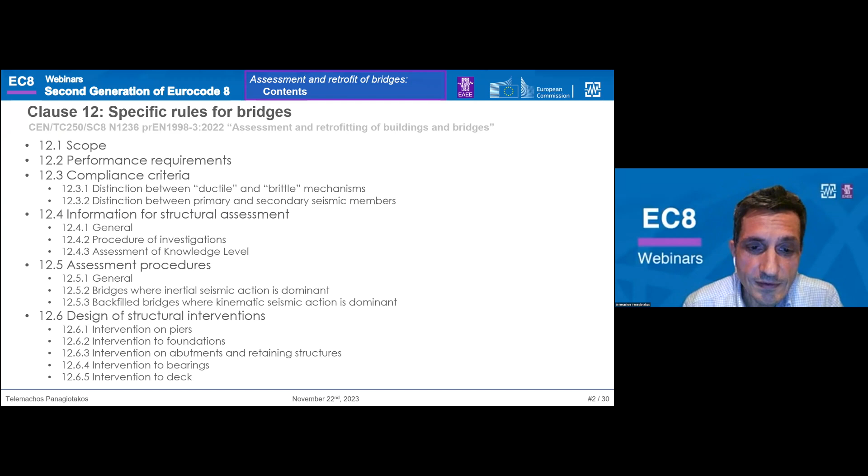The first section covers the scope, the second the performance requirements, the third the compliance criteria, the fourth gives information for structural assessment, the next section covers the assessment procedures, and the last section covers the design of structural intervention.

How everything starts regarding the bridges - apologize for this - we have the mandate M515, where it's requested the extension of the scope of Eurocode 8 Part 3 to cover the assessment and retrofitting of bridges.

Through this mandate, it requests that the provisions shall be mostly applicable to concrete and steel composite bridges, so we don't cover essentially masonry or timber bridges. But they ask also to cover the retrofitting of foundations and bearings, and to introduce base isolation and the addition of dissipative devices as part of the retrofitting solution for bridges.

Therefore we have a new clause, clause 12, which does not appear in the current version of Part 3 of Eurocode 8, and we also changed the title of Eurocode 8 to add bridges, so now Part 3 covers both buildings and bridges.

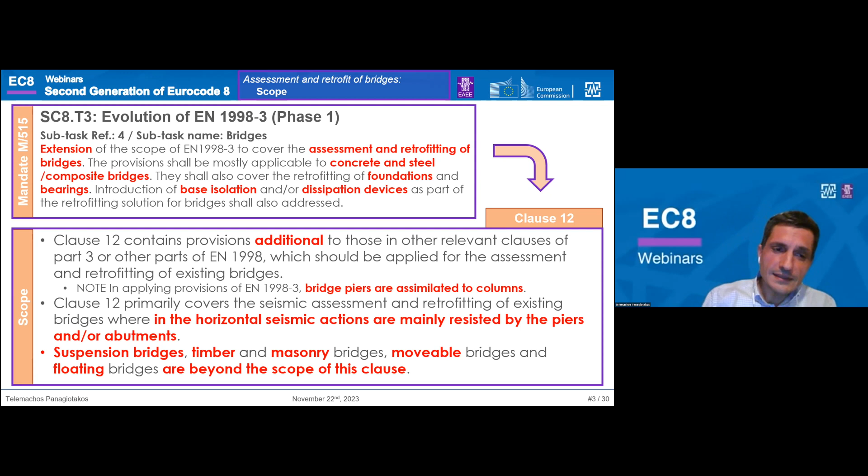Also suspension bridges, timber, masonry, as already said, movable and floating bridges are beyond the scope of this clause. This is defined in the scope of clause 12 of Part 3 of Eurocode. So we have a chain of sections in order to follow the provisions for the specific rules described or defined in clause 12 related to bridges.

In the first section we cover the performance requirements. Essentially we set here the targets, which is the performance requirement, and we have two targets: the limit state and the seismic action.

The limit states, as already mentioned before in the Eurocode Part 3, we now have four: near collapse, significant damage, damage limitation, and fully operational. We can select one of them. Near collapse is preferable, but the relevant authority or the owner can choose another one.

The issues related to the seismic actions are essentially covered by the importance of the bridge, because the importance of the bridge is expressed either in terms of the return period or performance factors. Therefore, essentially, we set the seismic action in this way.

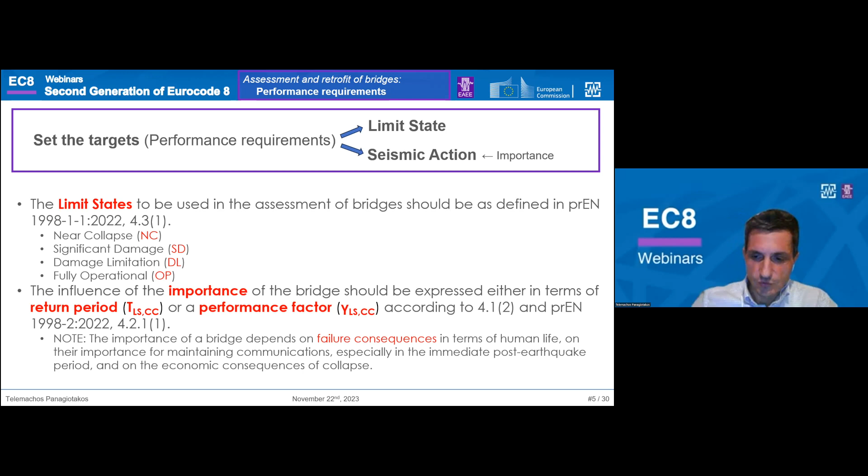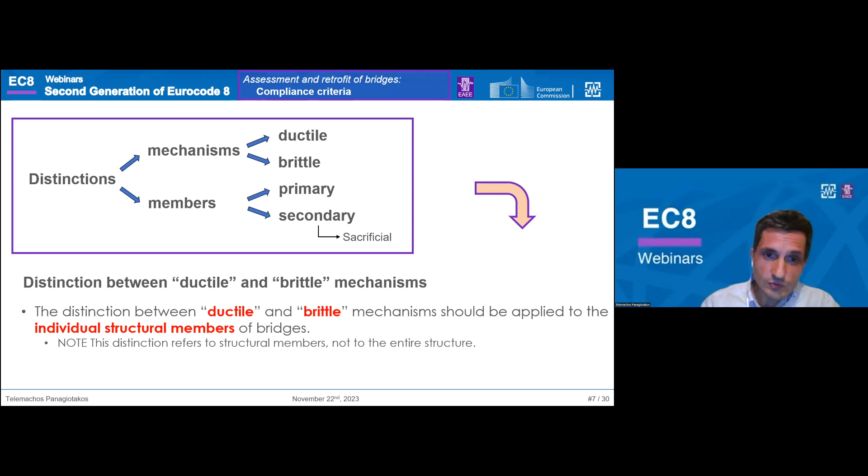The second section covers the compliance criteria, and here we have two critical distinctions. The first is the distinction between ductile and brittle mechanism. We already know this from members, but what is very critical in bridges is that, unlike in buildings, this distinction between ductile and brittle mechanisms applies to the individual structural members, not to the whole structure.

The second distinction, which is more critical and appears here in bridges, is between primary and secondary members. What is the definition of this? It's very tricky: except those listed as secondary seismic members, all structural members of the bridge should be designated as primary members. The definition comes in Part 2 of Eurocode, related to the design of new bridges, where you can find detail about primary and secondary members.

Secondary members, however, need to be capable of sustaining gravity loads and the horizontal displacement induced by seismic action, implying that their collapse is not permitted, because secondary members are there to continue supporting other members after the earthquake. For this reason, secondary members are expected to be included in the model, but neglecting their stiffness, since they are not participating in the horizontal resistance of the bridge.

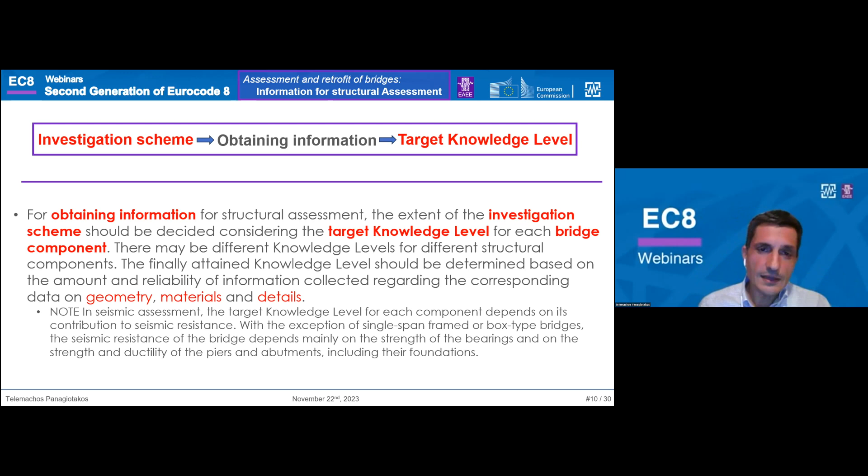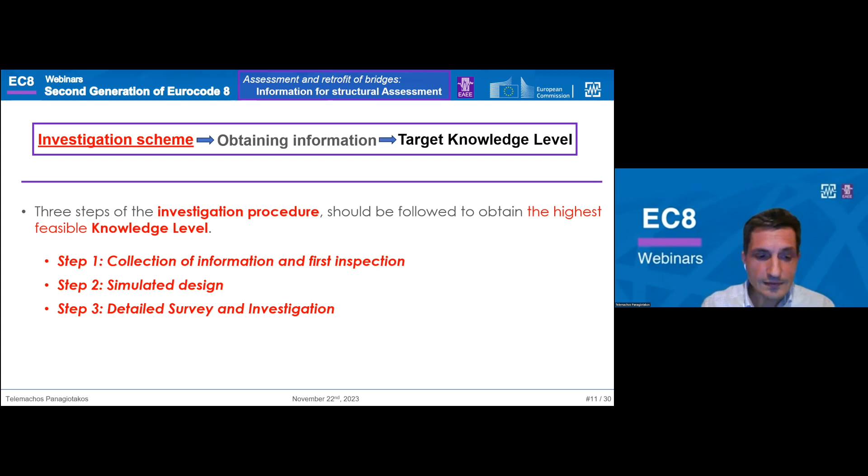The specific provisions for this are covered in another section of Part 3. Regarding the investigation scheme, in bridges we propose a 3-step procedure in order to obtain the highest feasible knowledge level, which is the target. These steps are: first, collection of information and first inspection; second, simulated design; and third, detailed survey and further investigations.

Going to the first step of this investigation procedure: it consists of gathering available information concerning the existing bridge and performing the first visual inspection. Gathering of information should include collection of all available information related to the bridge, such as as-built drawings, design and construction drawings, calculation notes, specifications, site reports, damage reports, soil boring and test logs, geotechnical reports, hydrological reports, and maintenance records.

During the first visual inspection, we perform a geometrical and topographical survey in order to establish the geometry of the bridge. In the absence of verified drawings, new general arrangement drawings should be developed after the survey. All structural defects, and this is very important, should also be recorded during this first inspection.

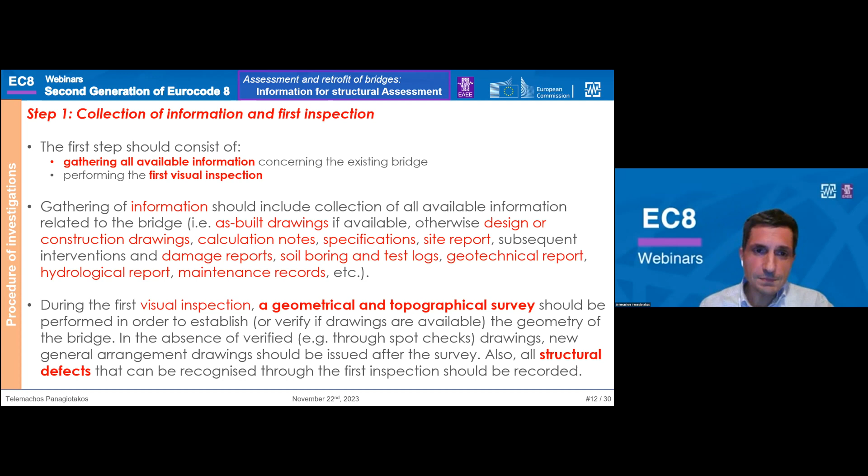In the second step, we have the simulated design, which essentially uses the results of the previous step, the geometrical survey and the first visual inspection, in order to verify uncertainties of the geometrical and topographical survey and design assumptions.

What are the design assumptions in bridges? For instance, the geometry of tendons, the pre and post tensioning forces for the tendons, the reinforcement and the critical area of reinforcement, arrangement of the reinforcement, hidden or unavailable details.

This can be done through a simulated design, which is a kind of back analysis. We use the standards and the specification of the original design, and we repeat the original design essentially. This is a kind of simulated design. This is part of what is already in Annex A presented as preliminary analysis, but a little bit different. Of course, if reliable as-built drawings are available, this step may be omitted.

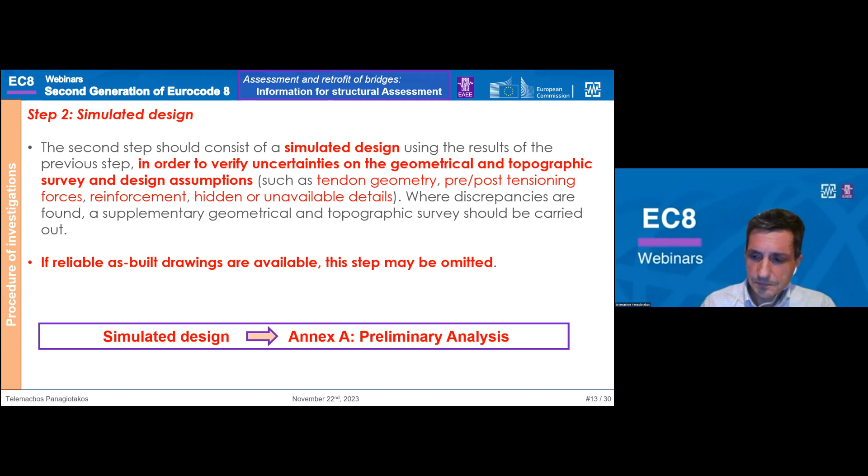The third step should consist in completing, from one hand, the geometrical and structural survey, and from the other hand, investigations. The detailed geometrical and structural survey may be necessary for assessment of hidden foundation details. I'm focused now on foundation, which is very critical in some cases. This can be done through shafts or using georadar, ground penetrating radar, etc.

Locating tendons and reinforcement through electromagnetic scans and cuts, or trying to find out the tendon forces through cross-bow methods, etc. The investigation should be performed where insufficient information is available to determine if the existing structure can resist seismic action, or preliminary evaluation indicates that retrofitting is required.

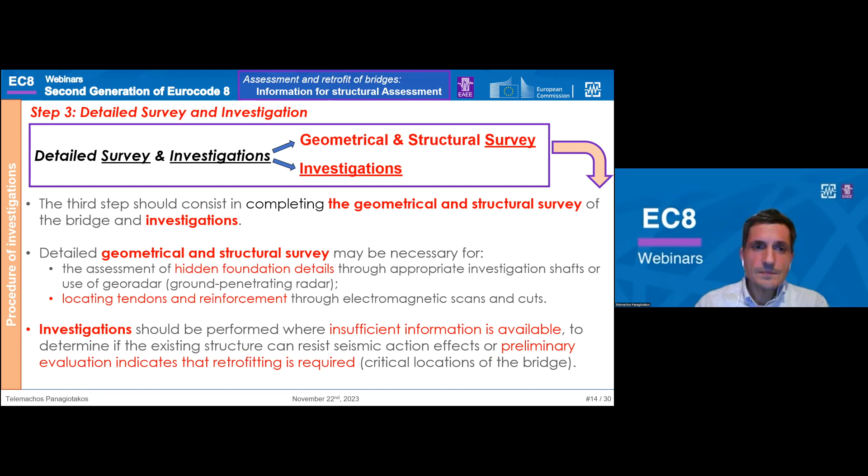The investigation essentially covers properties of the material and how we can find the properties of the material. We can estimate the concrete qualities and properties through various methods that exist, destructive or even non-destructive, like concrete coring, which is destructive, ultrasonic pulse velocity measurement, which is not destructive, pull-out test which is destructive, Schmidt hammer test which is not destructive, pull-off test which is destructive, etc.

I have to note here that all these methods are covered by appropriate standards, EN or ISO, so it's written in part 2 and part 3, the standard that you can follow to achieve the test and how to calculate through the test the properties of materials.

Another critical investigation that we need is the estimation of type, grades, properties, and condition of structural steel, reinforcing steel, and tendons. We have here also similar methods. During the investigation, we also need to estimate the condition of bearings and connections. And finally, this is what we request here: an investigation for the estimation of the effects of age and durability of the structure, which is critical.

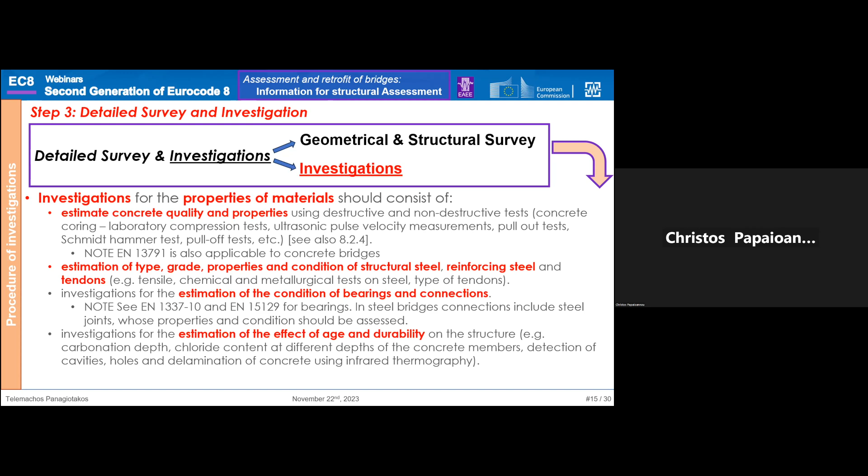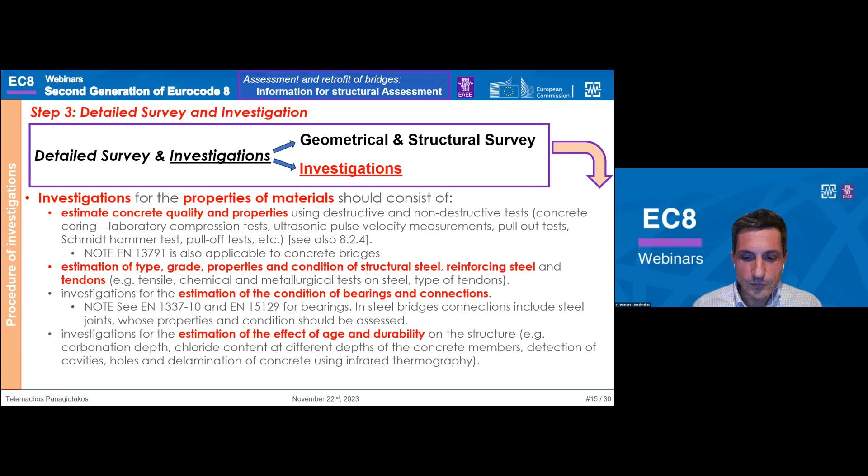So for concrete structures, we need the carbonation depth, the chloride content at different depths of the concrete members, detection of cavities, holes, and delamination of concrete using various methods such as infrared thermography. This is the test requirement in order to achieve the full, or almost the full, picture for the structure.

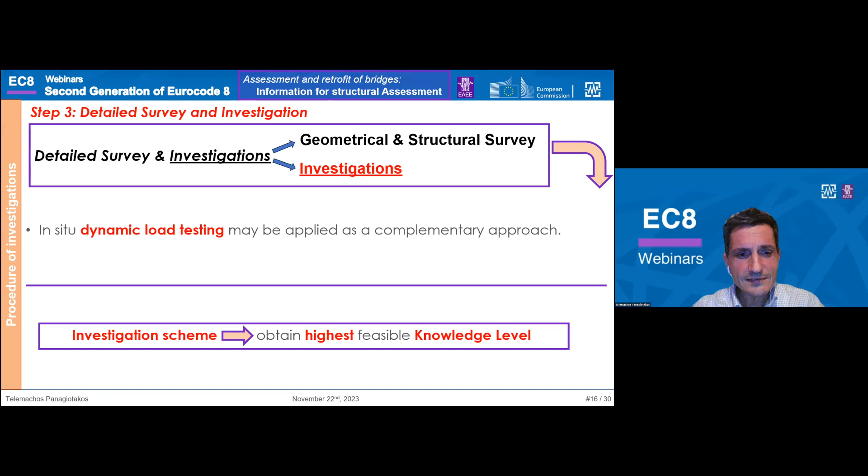Finally, there's also other methods that can be done, like dynamic loading testing, which gives us details regarding the bridge. Therefore, through the investigation scheme that we follow, covering the survey and the test, we try to obtain the highest feasible knowledge level for the structure, for the bridge.

With the exception of box-type bridges, there are 6 types of structural components, and this is very critical - we don't have this in buildings. We have individual structural components identified per bridge, and for each structural component, we have a specific knowledge level depending on the information that we gather from the test and survey. So what are these types of structural components? It's the common components that we have in a bridge: the deck, the pier, the foundation, the abutment, the bearings, joint and connection.

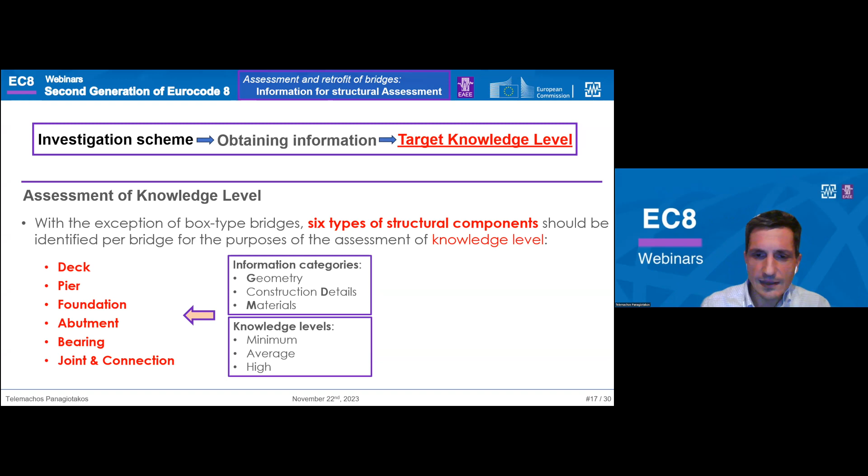We have to identify these components in bridges, and for each one of them, we have to give information category regarding geometries, construction details, and materials, and the relevant knowledge level - we know that there are 3 classes: minimum, average, and high. So the knowledge level for each category of information, namely geometry, construction details, and materials, should be representative of, and this is critical, the critical region - not the pier in general, but the critical region of the pier should be assessed, and there we have to set the knowledge level.

For the geometry, and this is another requirement especially for bridges, as a minimum, the average knowledge level should be attained through the investigation scheme. So we have to extend our investigation to attain the average knowledge level for the geometry for all the critical components. For each component and material, the achieved knowledge level on materials is described in section 8 for concrete structures and in section 9 for steel and steel composite members.

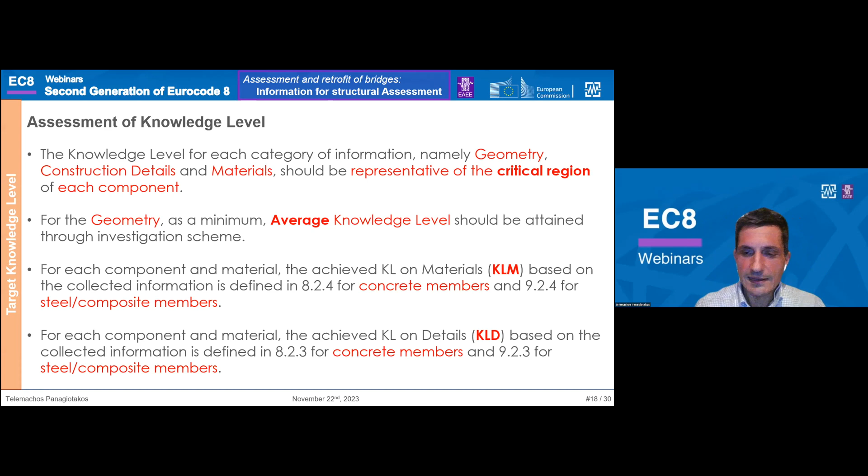And respectively, for the knowledge level on details, it's described in section 8 again for concrete structures, and in clause 9 for steel and steel composite structures.

Now, going on to the fourth step in this chain of steps or actions, in order to assess and retrofit the bridges, we have the assessment procedures.

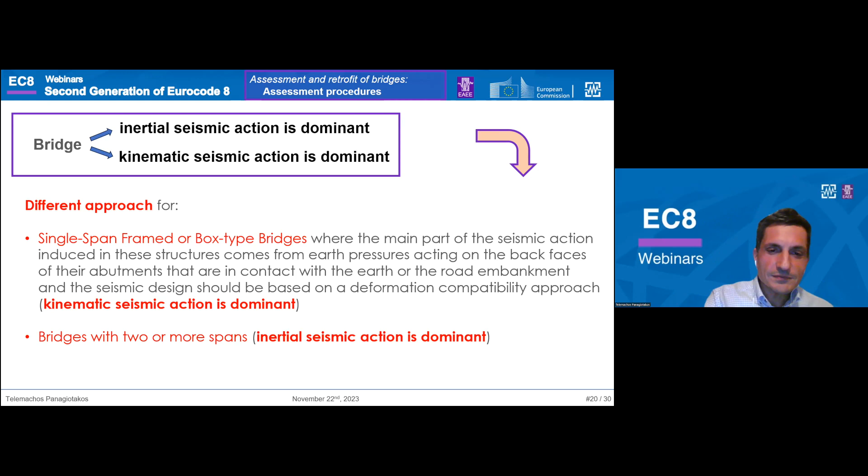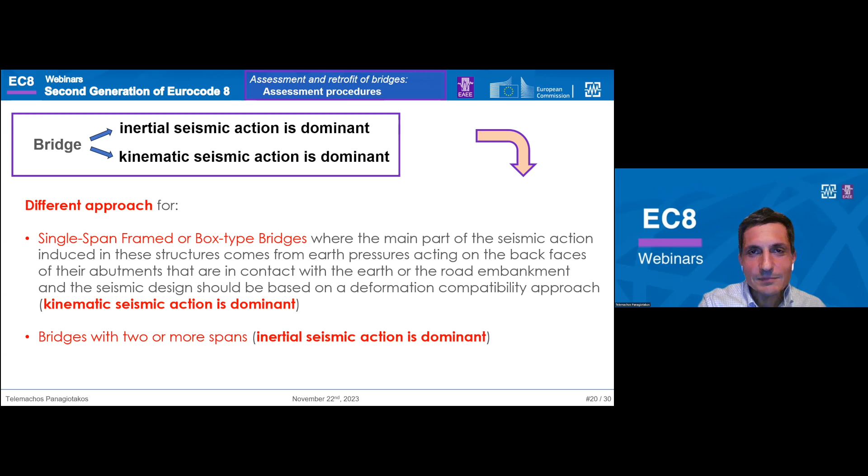One of the more innovative aspects we have in this part of Eurocode is this distinction between bridges regarding which seismic action is dominant. We distinguish bridges into single-span, frame, or box-type bridges, where the main part of the seismic action comes from the earth pressure acting on the back faces of their abutments in contact with the earth or embankment. The seismic design should be based on the deformation compatibility approach. Here we're talking about kinematic seismic action being dominant - this is one case of bridges. All the others belong to inertial seismic bridges, where inertial seismic action is dominant. Essentially, we separate bridges into two big categories: underpasses or single-span or box-type bridges, and all the others.

For all the other bridges, which is the majority of cases, the seismic analysis is described in clause 6 - we don't have something special in clause 12. The soil structure interaction is described and covered in part 2. We don't have something special here.

Material properties and deformation capacity were already presented in the previous chapter - we don't have special provisions here. Again, for shear verification, we have to refer to part 2 of Eurocode for bridges. And finally, the axial force of the piers - this is something now clarified, referring also to part 2 for new bridges, may be taken as constant.

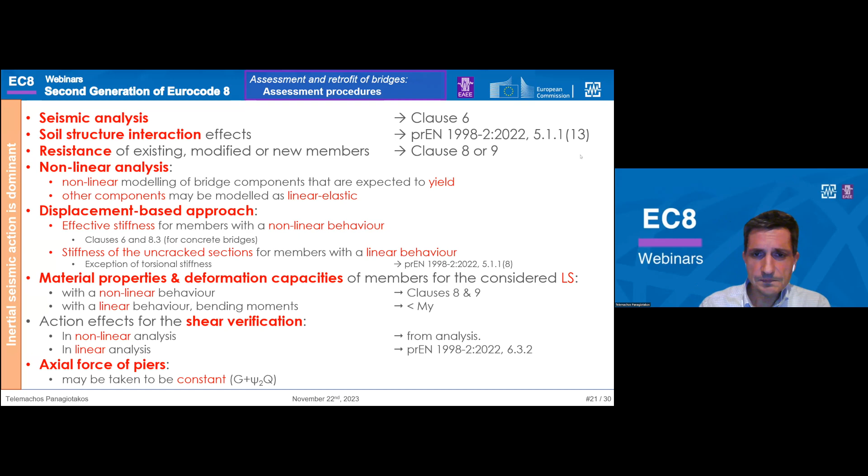Now what happens in the other, smaller category? I'm talking about the one-span, box-type, or frame underpasses - bridges where the kinematic seismic action is dominant. This is a special case. A realistic estimation of the seismic action effect for those bridges requires consideration of soil-structure interaction and the dependence of earth pressure on the back faces of the abutments on the compatibility of deformation between soil and bridge. The analysis method for this kind of bridge, either force-based or displacement-based, is presented in part 2 of Eurocode 8, so you can follow what is written there.

Why have we separated these bridges? Because essentially we have to take into consideration the resistance of soil for these bridges, and this is very critical - this is why we have a separate category for them. Otherwise, ignoring the resistance from soil, these bridges can appear very demanding in the seismic situation, and this is not true in reality.

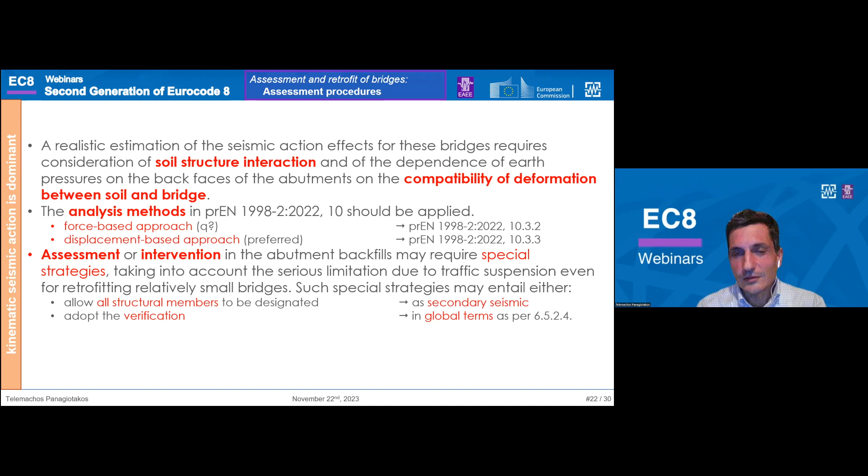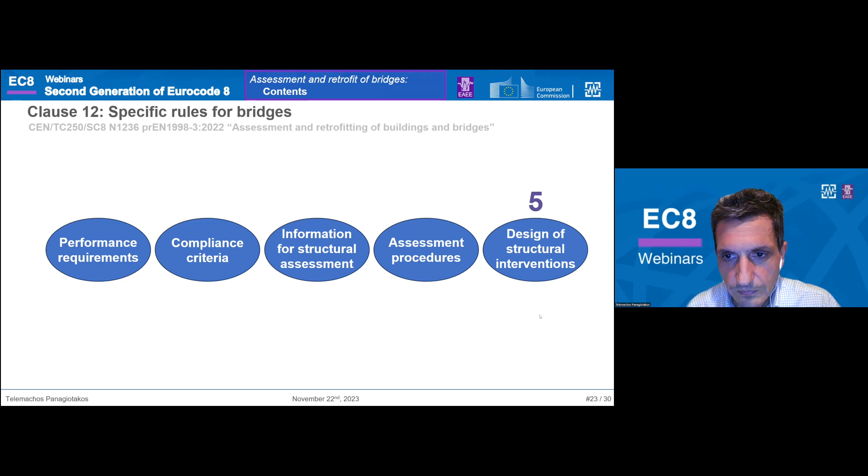Going to the final step in this procedure for the assessment of bridges, we have the design of structural intervention. In this section we have additional provisions beyond what is already covered in clause 7 of part 3, which is also general. Now, what is very critical - a good solution we know very well for bridges, for retrofitting or intervention, is seismic isolation. The design of the seismic isolation is covered by part 2 of Eurocode, because in any case the design for seismic isolation is a design for a new seismic isolation system applied on the bridge. So all the requirements are covered in part 2.

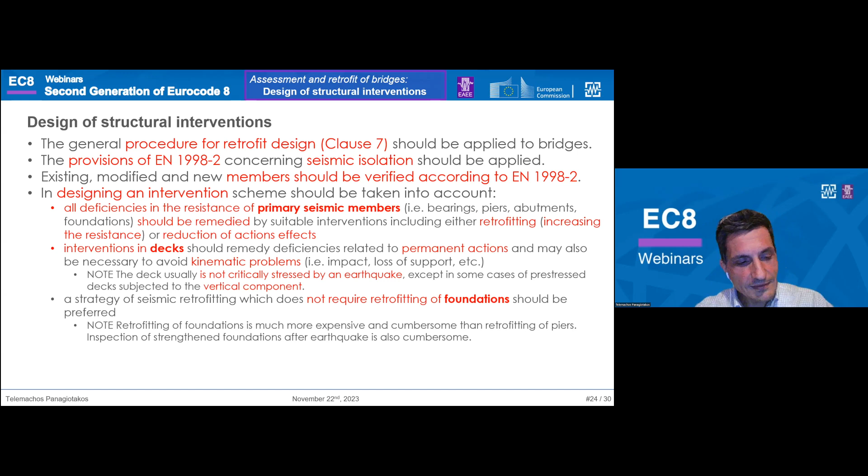In designing an intervention scheme, what should be taken into account? All deficiencies in resistance of primary seismic members should be remedied by suitable intervention, including either retrofitting or reduction of the action effect, which is not seldom in bridges. The intervention should also remedy deficiencies related to permanent action, which may be necessary to avoid kinematic problems - and this is something we have to take into consideration, kinematic problems like impact or loss of support. The strategy of seismic retrofitting which does not require retrofitting of the foundation should be preferred. This is very critical for people related to the design or intervention on bridges - it's something we know very well.

So now the chapter closes with the intervention of the structural components. The intervention on piers may include what?

Complete or partial replacement, addition of supplemental pier, shear and flexural retrofitting, improvement of pier ductility through confinement, reduction of action effect on pier through seismic isolation. If we isolate on the top of the pier, we have for sure a reduction of the action effect.

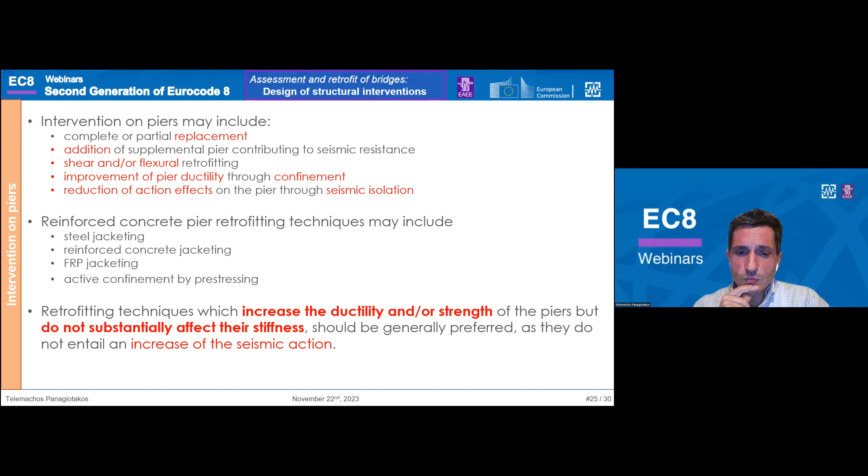Now, for reinforced piers, the typical retrofitting technique is through jacketing. Again, there's a provision that the preferable retrofitting techniques are those that increase the ductility and/or strength, and do not substantially affect their stiffness. We don't want to increase the stiffness, since if we increase the stiffness, we increase also the seismic action.

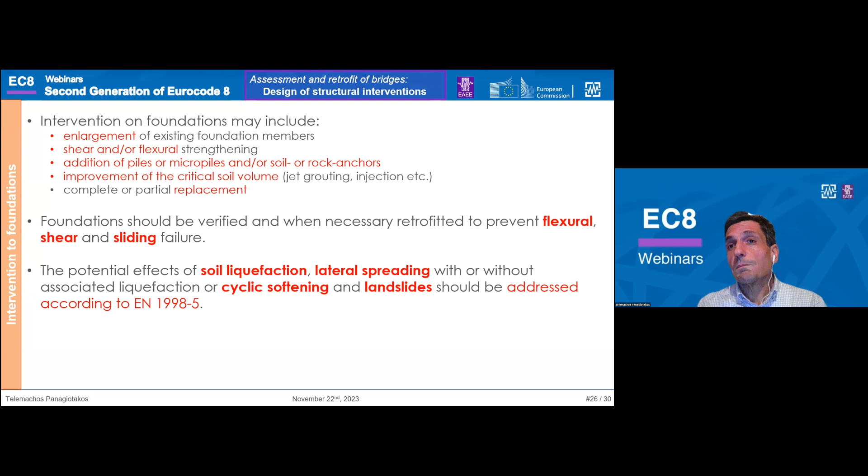Also, take into consideration potential effects from liquefaction, lateral spreading, cyclic softening, and landslides. But all these issues are covered in Part 5 of Eurocode.

Regarding the abutments, there are also various intervention proposals: shear and flexural strengthening, longitudinal support at the top of the abutment, adding soil or rock anchors, replacing part of the earth fill or the embankment with special foams like lightweight expanded polystyrene, or using reinforced soil, and of course complete and/or partial replacement.

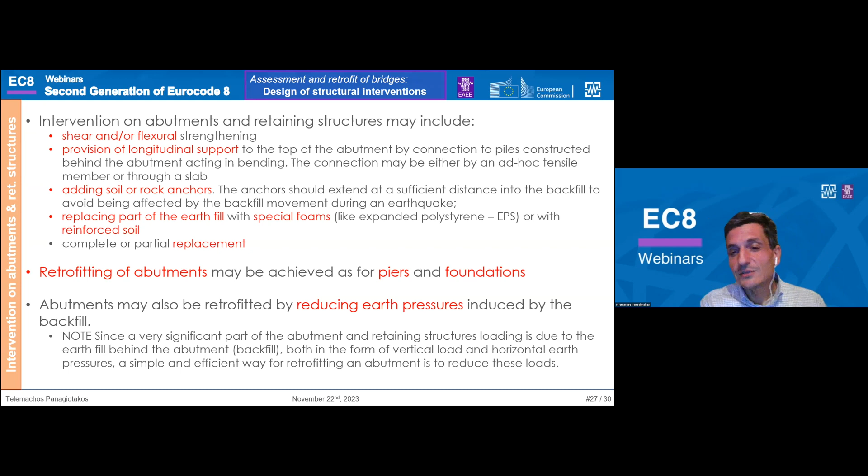For the body of the abutment, the retrofitting techniques are the same as we have for piers and foundations. Again, there's a recommendation that when abutments are retrofitted, we prefer to reduce the earth pressure. This is something that is very good for existing structures.

Going to bearings, what do we have to do? Replacement by new bearings, or replacement by seismic isolation bearings, or addition of energy dissipation devices. What is critical here is that the intervention to bearings may be required to assure that the forces of the deck are effectively transmitted to the piers.

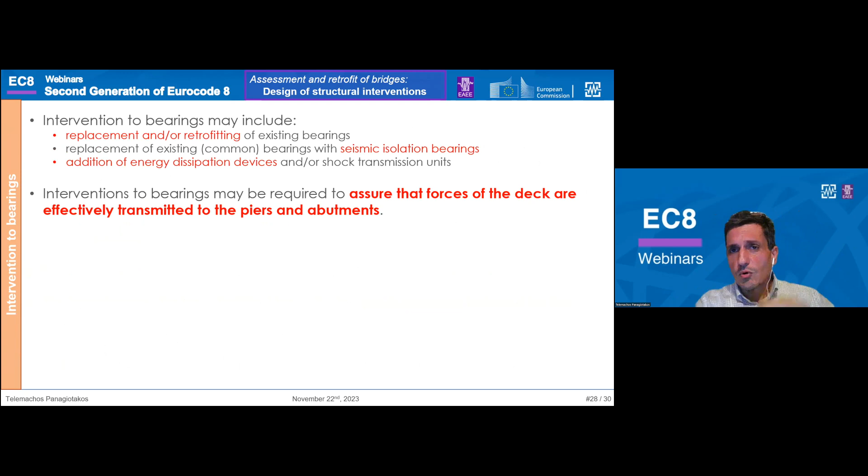We may also have to intervene on the deck and also on the piers. And finally, regarding the deck, what we can do for intervention: first of all, we can try to reduce the dead loads if we have additional load in some direction of the deck that we don't need anymore, and provide horizontal longitudinal continuity of the deck in order to avoid impact and unseating of the deck.

We can also retrofit or remedy the deficiency of the deck, retrofitting also the deck-pier joint connection if there is one, increasing the overlap length if it's not adequate, and using restrainers also in order to avoid the drop of the deck.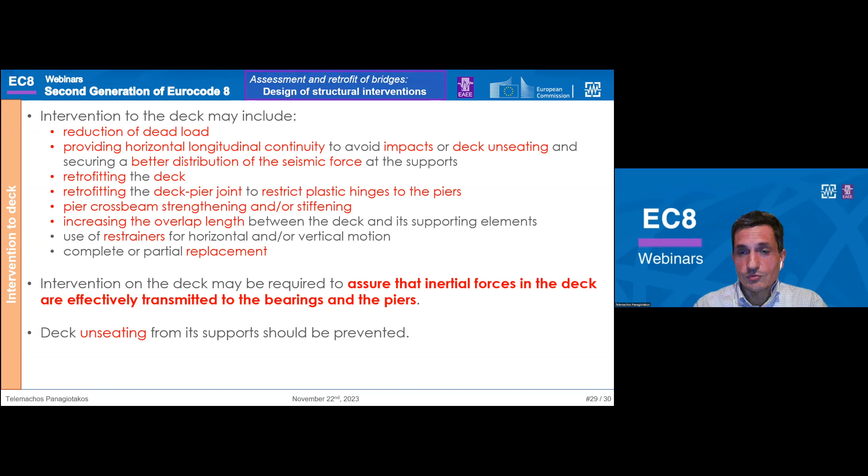And again, the last solution is a complete or partial replacement of the deck. Again, special note is given to avoid unseating and to check the unseating of the deck, because it's critical for existing structures.